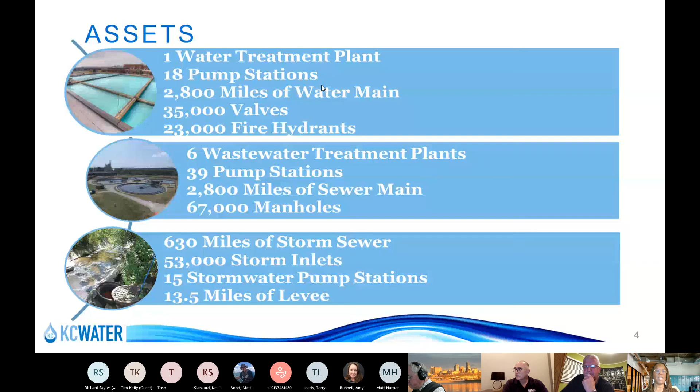This project is a PIAC project. PIAC means Public Improvements Advisory Committee. The primary function of the Public Improvements Advisory Committee is to solicit resident input and make recommendations regarding both the citywide and neighborhood portions of the capital budget. The PIAC holds a series of public hearings every year beginning in early summer. These hearings provide residents with an opportunity to express their opinions, concerns, and project requests regarding the forthcoming capital budget.

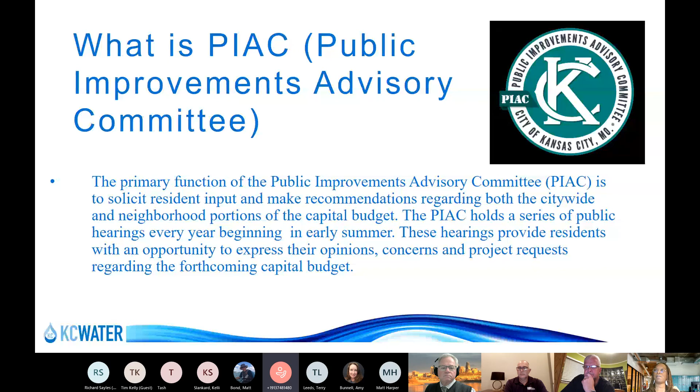Now on to some details about this project. This project will be stormwater improvements in your area. That is, like I said earlier, between 108th and 109th along North Manning Avenue. The improvements that we will be providing will be to stabilize the channel by installing rock grade controls, to stabilize the existing slope failure and stacked stone retaining wall with drilled piers, and to regrade and restore the channel banks.

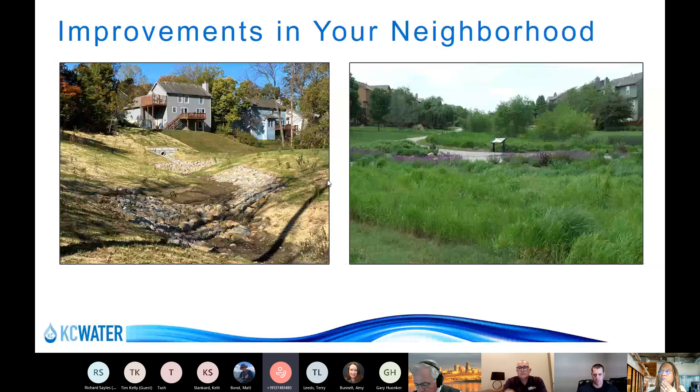You'll always have access to your driveway. Your driveways won't be blocked. There could be some possible temporary closures of one lane or something while construction traffic is coming through. But there is a traffic control plan, so that'll all be taken care of, or all be understood as well.

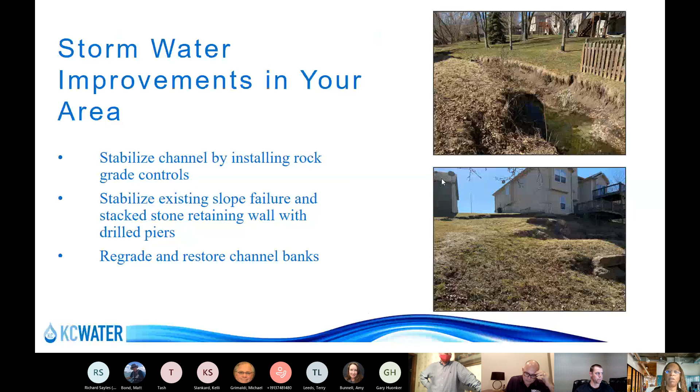Yes. So if you look there, between 8900 Northeast 108th Street and 8904 108th Street, that's the intended access point to get to the project site, and then from there they'll certainly be able to access the drilled pier location, but then also the grade controls and the other grading needed as part of the project. So that's the planned access route.

Right. There's also an access off of Manning that they might use a little bit too. There's a drainage easement that runs along this entire streamway corridor, so they may be able to access off of Manning as well through that easement. Yeah, not the hiccup, so to speak, but there's an existing sanitary manhole there, and a couple retaining walls at the culvert at the downstream end; that was the reason why this one is currently chosen. But if they're able to get in off of Manning, they'll do that as well. Like Don said, there's an existing drainage easement there.

And then I think you had 3 questions, sir. Yep, I remember the third one. What was the second question? The second question had to do with whether the homeowner is participating, so we'll leave Diana to answer that one. Oh, you answered the third one, I think.

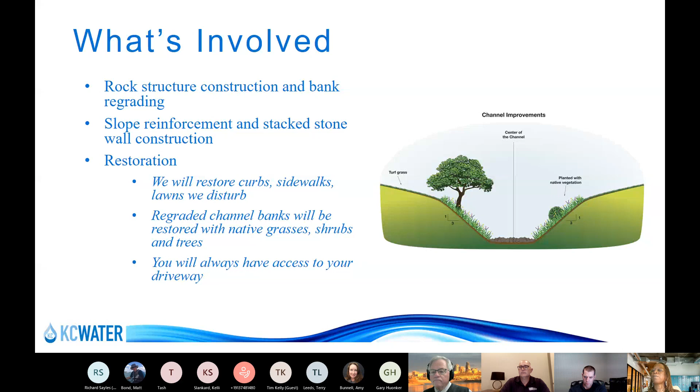Let's see. I'm looking at that picture. You said you're at 9005? Yes. Okay, she's right here. I'm not exactly sure as to what yard she will gain. Do you have... There you go, there she is, right there.

So, Ms. Kelly, at your yard right there, what we're actually doing is essentially preserving what you've got. The stream location is lined up very well with the outlet culverts that eventually go under Manning. That stream bank is starting to erode, and in our analysis, the soils present over at 8900 are also present at your yard; they're just not as deep. So after quite a bit of deliberation, we thought it made sense to put in that short retaining wall so that you basically don't lose any more yard and you keep that limit, if you will.

But at the same time, are we flattening the yard a little bit there, Matt? I don't think we are. At least it's going to keep it flat like it is now. Right. Okay. Thank you. Sure.

Okay. I think I just saw it. Did Tim Kelly have a question, or was that a? No, it just went away. Never mind. Yeah, you can just remove it. Sorry, unless I still have my hand up. I took it down. Sorry. Oh, okay, that's okay. All right. I'm not quite sure how it works like this, how the questions work. So that works out fine. Okay. Yeah, I was looking at that too, Matt.

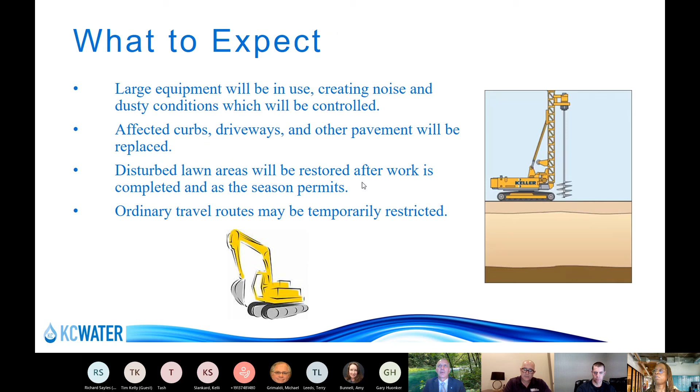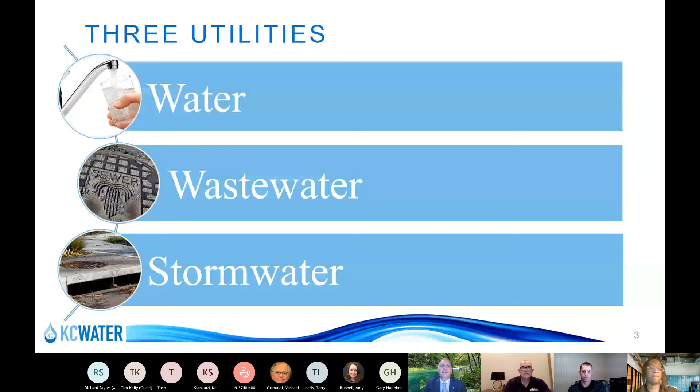So Tash, did you have an additional question? Did you just raise your hand again? I have an additional question because I remembered that we did receive notification that the project was going to start this fall. And now I'm hearing that it's going to start late spring, early summer. How are we sure that this is what's going to happen? Because we've been enduring this situation for years now.

Okay, so as you heard during the presentation, we did have to run through a couple of iterations to get the best design possible for this stream bank. The design team had thought that we could use one method, and then when we got our geotechnical analysis, we discovered that method would not work and we had to use another method. That's the process of designing.

You sometimes think it's going to go one way until you get more scientific evidence that indicates that you need to do another method. So that pushed back the date because we had to make sure that we would supply something that would be a strong replacement for what we had found there, which was that the soils were no good and that we would have to use something that would be a more long-standing method. So during the presentation, that's why we presented that additional information from the design team to indicate that, hey, we started down one road and found out we had to go another route. So that added more time to it.